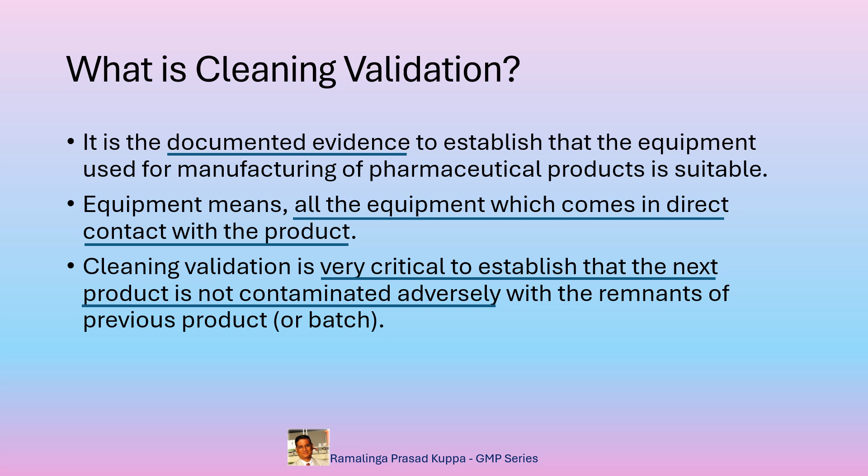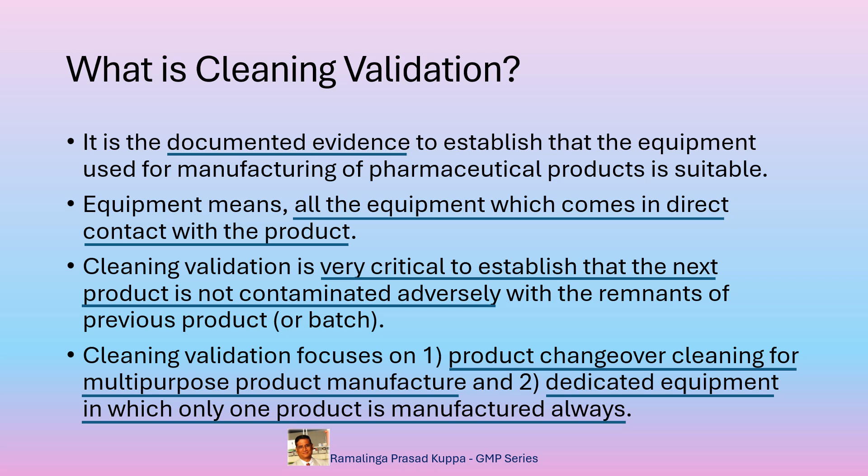Cleaning validation focuses on product changeover cleaning for multi-purpose product manufacture and dedicated equipment in which only one product is manufactured always. We will limit the discussion to case 1. Case 2 will be discussed at another opportunity. Let us understand the equipment cleaning strategy.

"Clean the equipment until clean" is not the right procedure. Cleaning until it is totally free from previous product contamination is not the right approach. It might take too long a time also. It is not required. It is not economical also. There should be a strategy which is optimum and economical to handle cleaning of equipment. The strategy should be developed on a scientific basis.

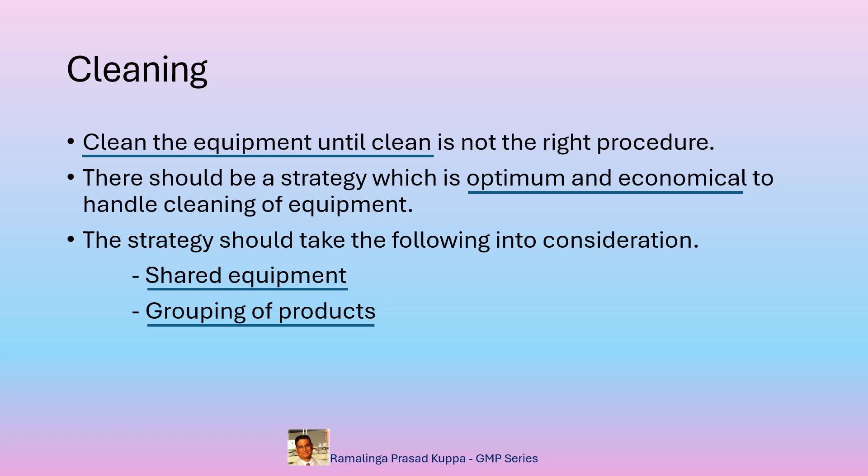The strategy should take the following into consideration. Shared equipment. By simple meaning, shared equipment is the equipment that is used for many products in common. Equipment that is not shared will have a different strategy of cleaning procedure and schedules. Grouping of products. This is important. Grouping can be done for each common cleaning method. Worst case situation. This is another approach. Cost benefit. This is also important. The manufacturer does not manufacture the product for charity.

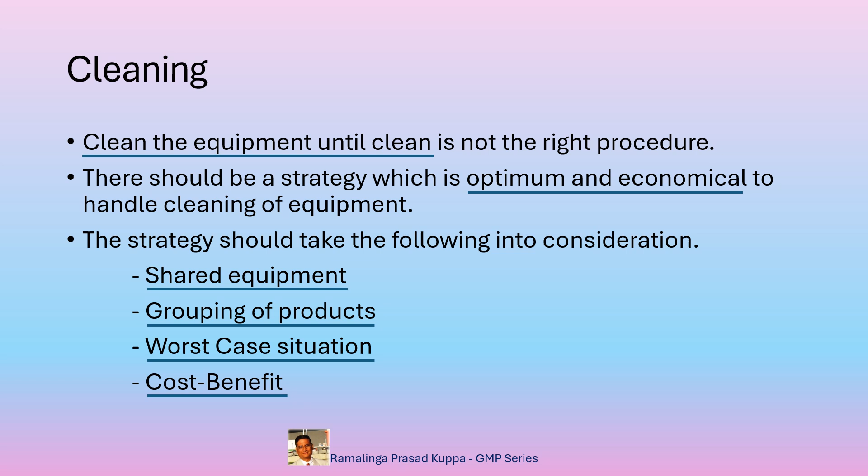Let us see the path forward. Cleaning of equipment should be carried out to achieve the acceptable residue levels. After discussing so much, let us understand the path forward. So, it is clear that the equipment should be cleaned up to a certain extent to achieve reasonable acceptable limits for residues of the previous product. Acceptable residue is calculated as per the maximum allowable carryover, that is MACO. This is the key for cleaning procedures and validations.

Details of calculations of MACO will not be discussed here. This was discussed in detail in my previous training videos titled Cleaning Validations. You may look into those videos. It was made about a couple of years ago in two parts.

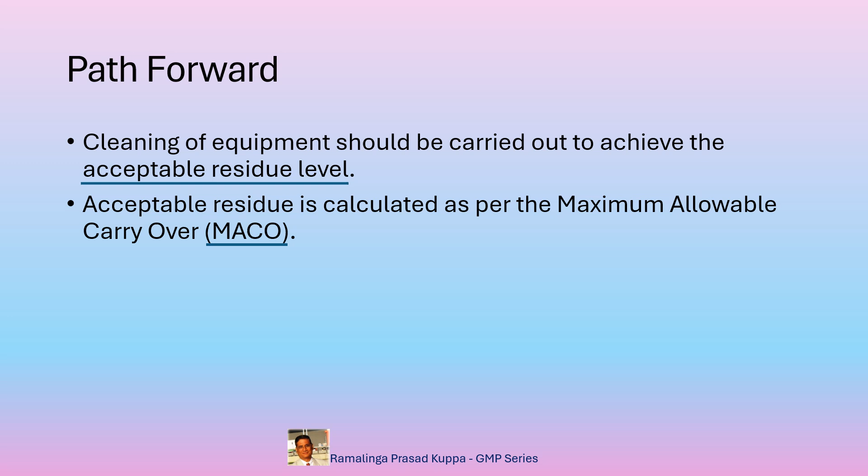MACO is calculated by therapeutic dosage criteria, toxicity data, and the third, the 10 ppm criteria. For APIs and drug products, you can get the therapeutic dosage data. For certain intermediate products or other key materials, toxicological data will be considered. In general, the 10 ppm criteria is widely used for calculating the MACO values. In real life situations, mostly either therapeutic dosage criteria or 10 ppm criteria will be the stringent specification.

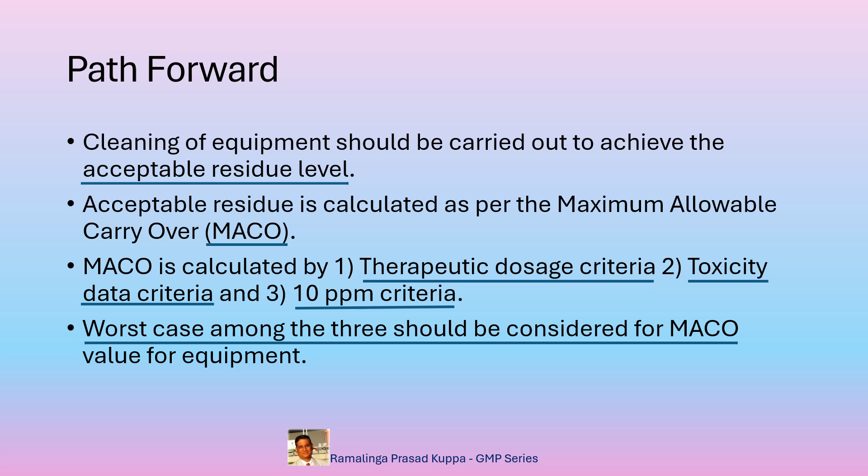The worst case among the three should be considered as the MACO value for the equipment. So the least MACO from the calculated values from the above three approaches will be considered as the acceptable limit for MACO. Let us understand more of the shared equipment. In a multi-purpose manufacturing facility, many equipments are shared for more than one product.

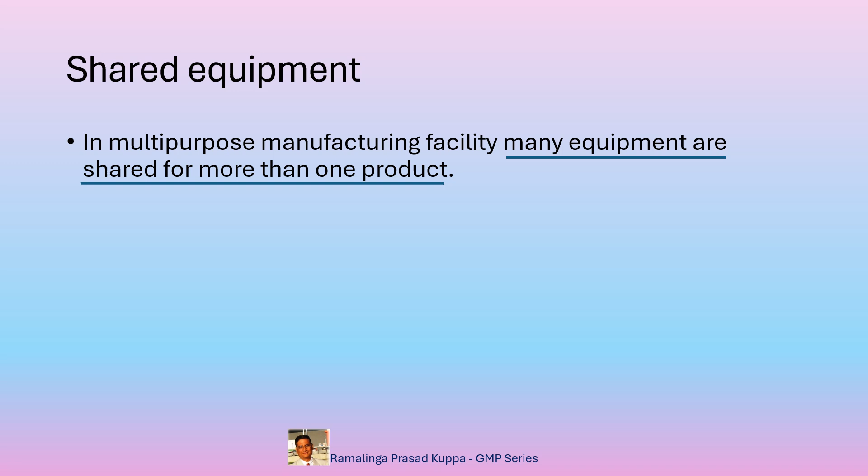Let us understand the complexity of shared equipment. Equipment including reactors, centrifuges, dryers, pulverizers, micronizers, filters, etc. are mainly shared for more than one product. There may be clean in place (CIP) and clean out of place (COP) equipment. CIP equipment cannot be dismantled for routine cleaning. It is a complex system. Cleaning approach for such systems is complex.

Detailed risk assessment should be undertaken to ensure that all hard to reach locations are cleaned thoroughly to see that the equipment passes the acceptance criteria. The cleaning approach for COPs is relatively easier because the equipment can be totally dismantled and cleaned.

There may be few major equipment and few minor equipment. Major equipment means more contact surface, and with hard to reach areas. Minor equipment is easily cleanable. Minor equipment include trays with flat and easily cleanable surfaces, scoops, scrapers, etc.

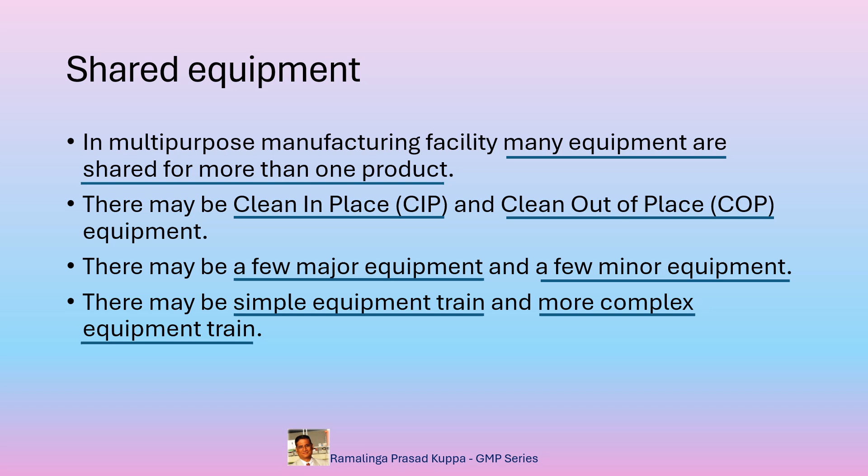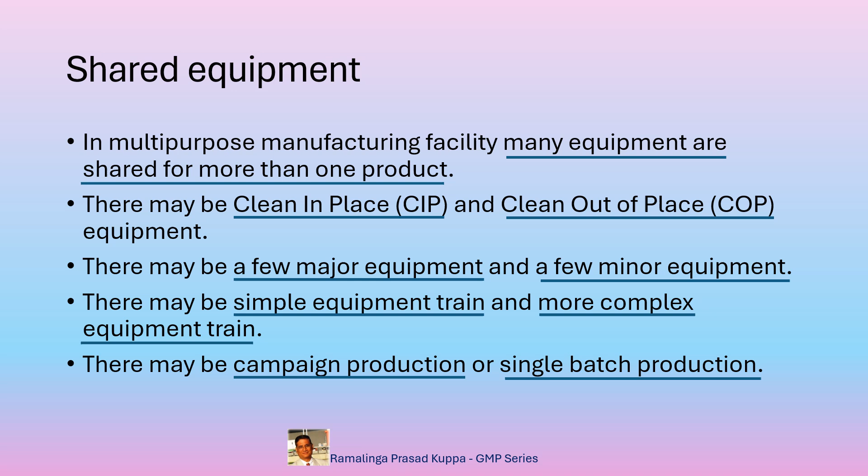There may be simple equipment train and more complex equipment train. The longer the equipment train, the more complexity in cleaning validation. There may be campaign production or single batch production. Campaign production cleaning can be less stringent as the same product will be manufactured for more than one batch. So, all these aspects should be considered in developing a strategy for cleaning validation.

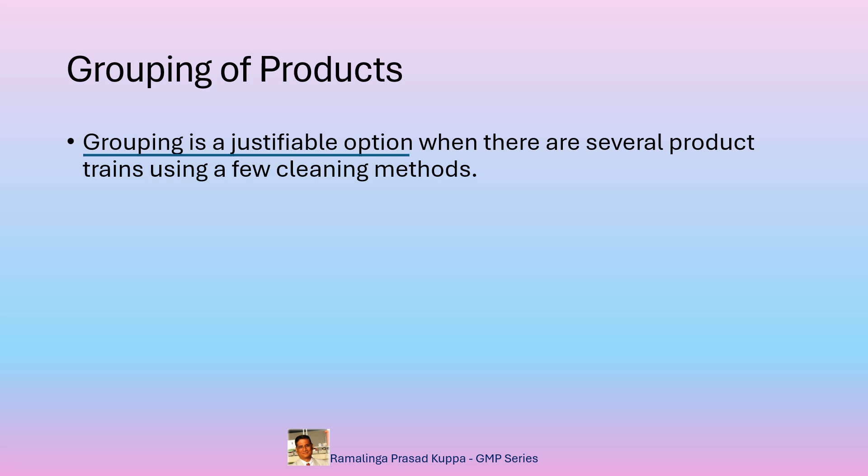Let us understand the grouping of products concept. Grouping is a justifiable option when there are several product trains using a few established cleaning procedures. This is a good strategy for selecting a grouping technique. For example, there are several products manufactured and the equipment are cleaned following two or three approved, established, common cleaning procedures. If there are 10 products manufactured in the equipment, only two or three procedures will be adopted for cleaning. This way, we can optimize using the cleaning procedures.

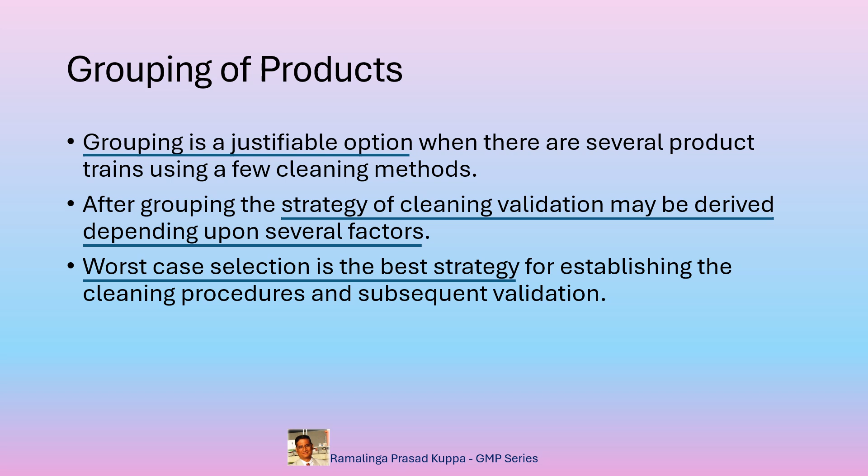After grouping, the strategy of cleaning validation may be derived depending upon several factors. The factors could include toxicity, solubility, sticky viscous residues of the previous product, dried scales on the surface of equipment, etc. Worst case selection is the best strategy for establishing the cleaning procedures and subsequent validation. Based on the evaluation of all the aspects detailed in the previous slides, the worst case may be established. A scientific and logical evaluation should be considered as path forward for selection of worst case. This is important. The selection should be based on scientific justification and not by any external or comfortable options.

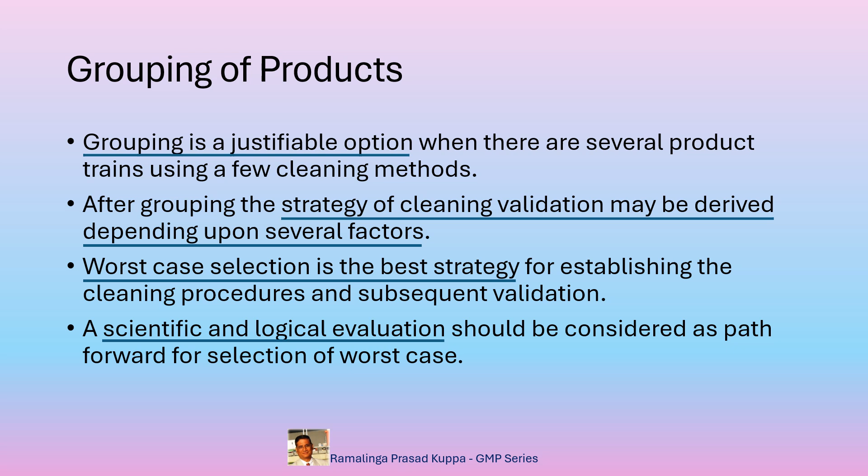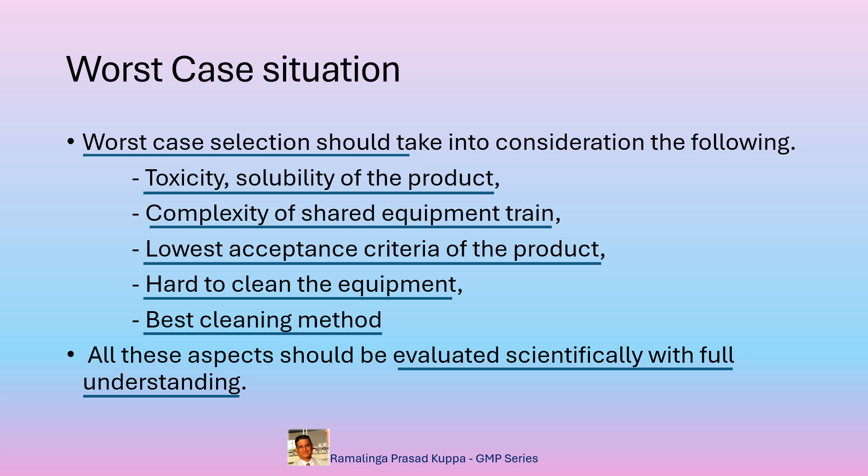Let us see the criteria for selection of worst case situation. Worst case selection should take into consideration the following: toxicity, solubility of the product, complexity of the shared equipment train, lowest acceptance criteria of the product, hard to clean equipment, best cleaning method. So, to sum up, the worst case scenario should be justified by discussing all these aspects in vast detail. All these aspects should be evaluated scientifically with full understanding. This is important. The team involved in designing the cleaning validation strategy and program should have complete and comprehensive understanding on the subject, and there should be consensus among all the participant team members while establishing the worst case situation.

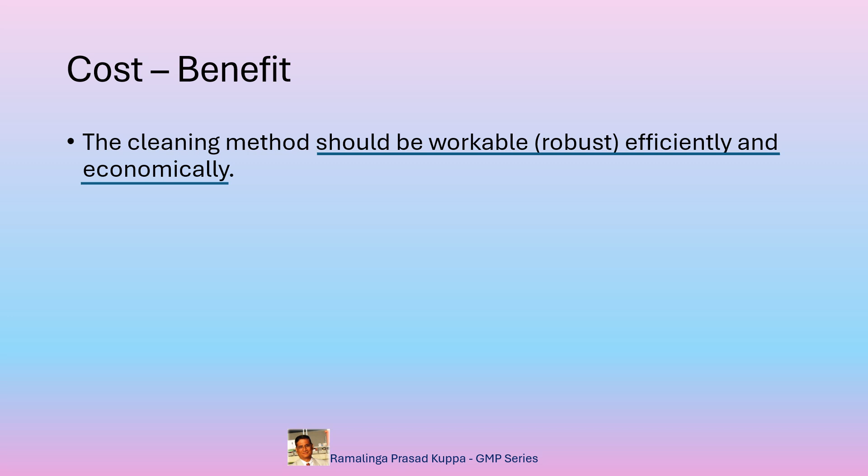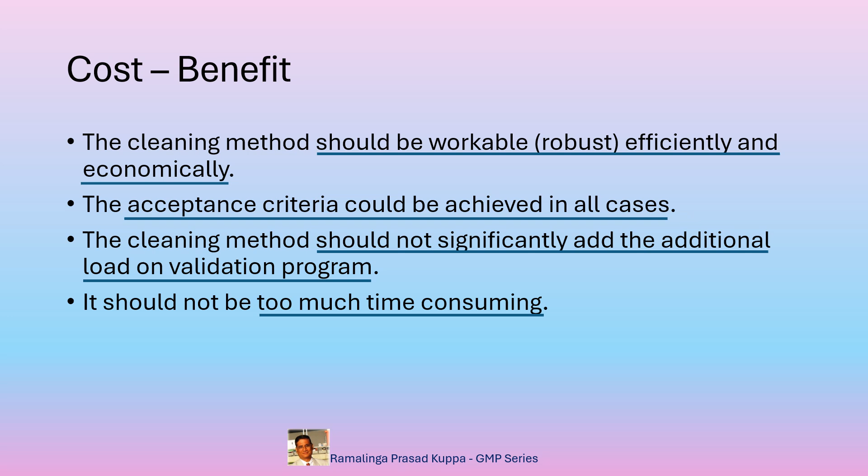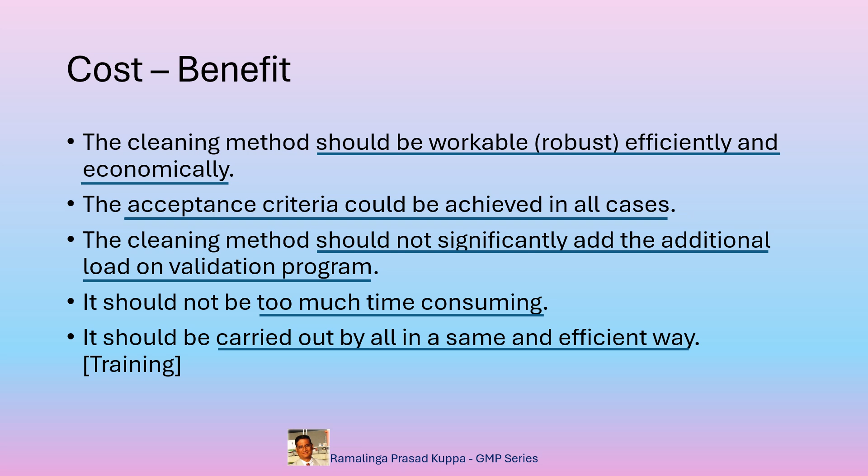Let us see the cost benefit factor. The cleaning method should be workable, robust, efficient, and economical. So the method should be robust and optimum. The acceptance criteria could be achieved in all cases. The cleaning method should not significantly add additional load on the validation program. It should not be too much time consuming. It should be carried out by all in the same and efficient way. All these aspects should be carefully considered to get a cost benefit from the validation program.

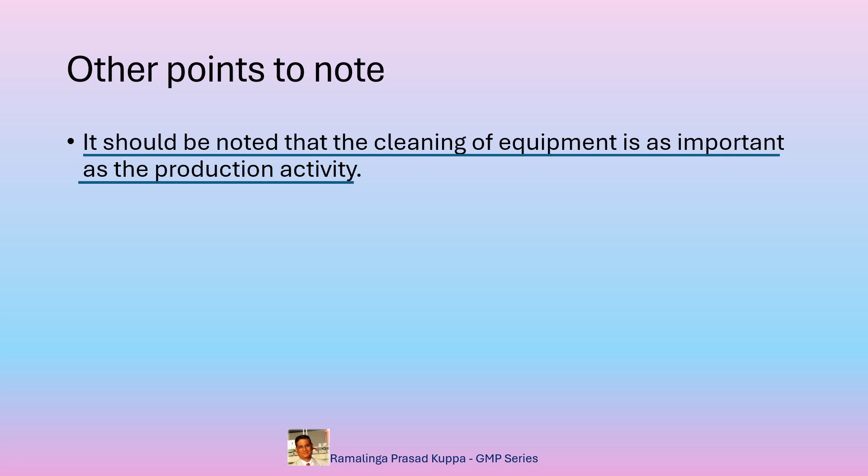Let us see other important points to note. It should be noted that cleaning equipment is as important as production activity. Many have a wrong opinion about the equipment cleaning activity. It is considered as a very small activity that should only be done by very junior level staff. The cleaning activity is as important as that of production activity. The cleaning validation documentation is a priority item for regulators and investigators or auditors. Any contamination could have fatal impact on patient health and safety. Contamination of unnecessary drug dosage of previous products can have adverse effect on the health of the patients and can be fatal in certain cases. I hope that this brief information of a vast subject of equipment cleaning validation is useful.